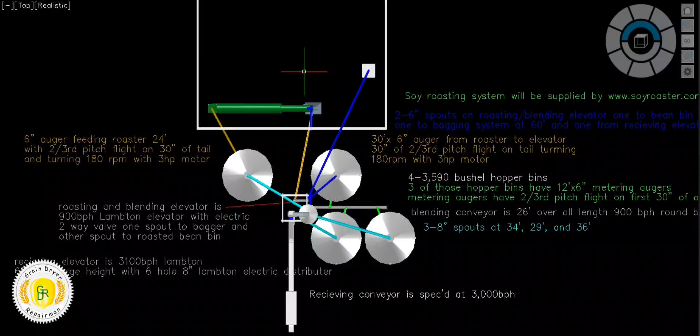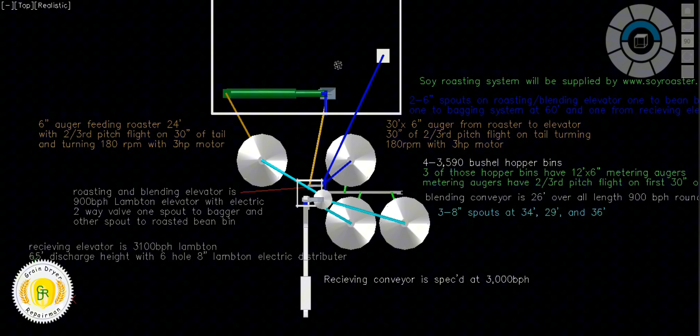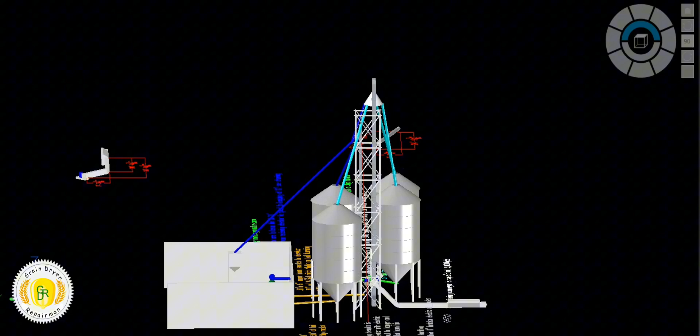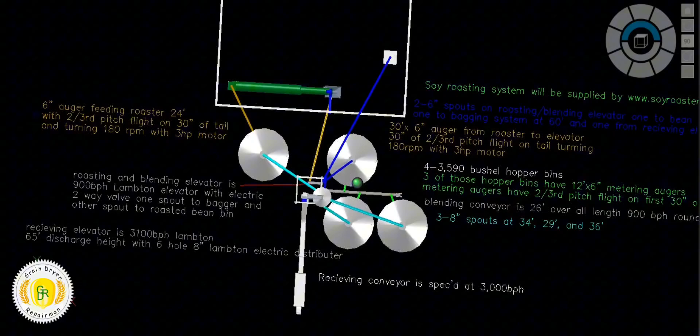Well, here we are. We're going to look at this facility for blending and bagging grain. We're going to roll it around a little bit. For a start, we have a receiving conveyor here. Trucks are going to drive across. It is above grade. So if we get this right at grade, it is right above grade. Comes up here. We're going to look at the measurements for that right away.

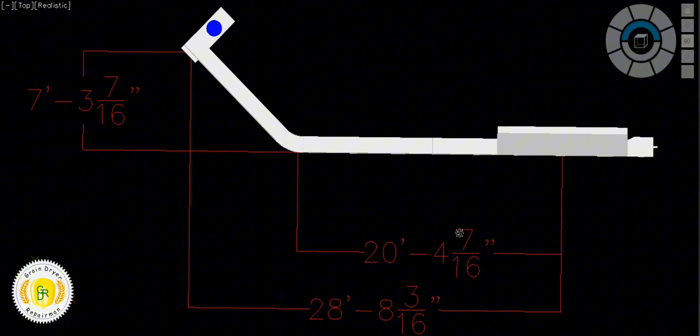This is the conveyor. We have 20 foot 5 inches from the center of the hopper to the elbow. We have 28 foot 9 inches, 8 inches, somewhere in that range, from the center of the hopper to the center of the drop. We have 7 foot 3.5 inches of rise from the bottom to here. And if all of these measurements are within a couple inches the same, that's great. We're not looking for exact, we're looking for very close.

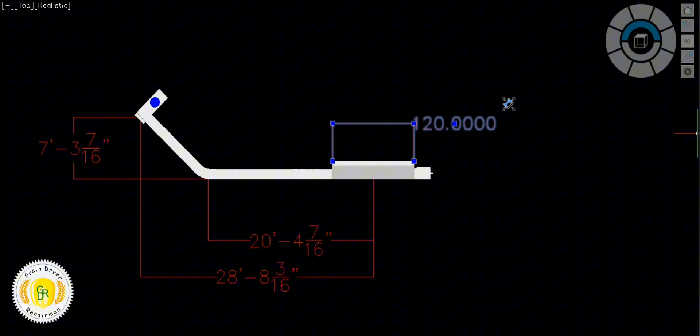So I forgot to put one measurement on here that you're gonna need to have. So we're gonna put that on here right now. And that is the hopper size. That's a 10 foot hopper. So that tells you everything you need to know for designing that drag conveyor. Now it is spec'd out as a 3,000 Lambton receiving drag, Lambton conveyor.

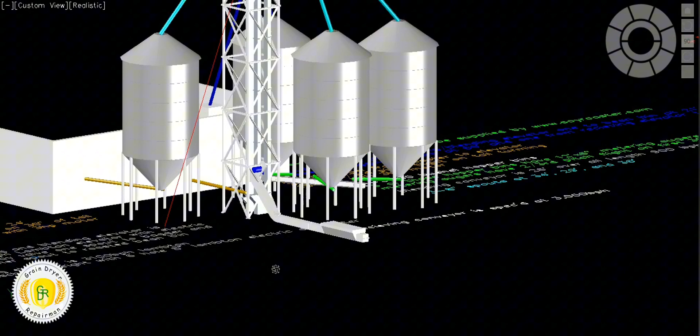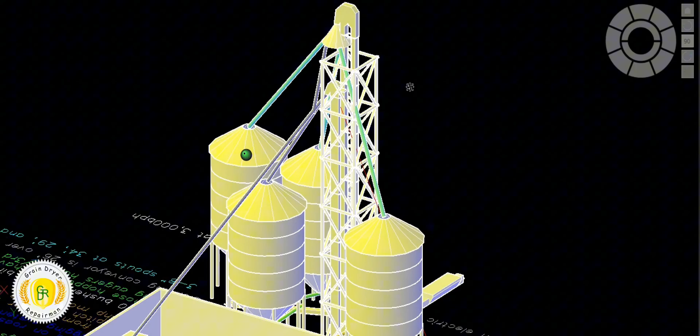The elevators, well, we're going to look at the tower next. We have drawn in here a 60 foot high 8x8 support tower. That is to hold, if you see in here, a little elevator and a larger elevator. I changed the view to make it easy for you to see everything. But inside there, we have this little elevator and we have this bigger elevator.

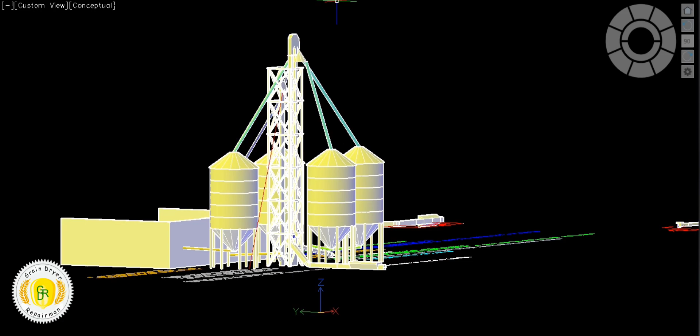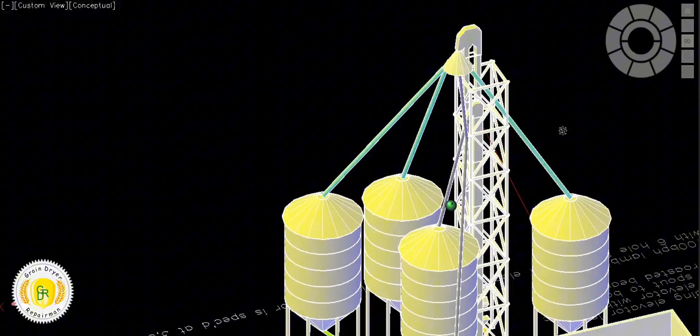The larger elevator is a Lambton 65 foot discharge with a 6-hole distributor, 8-inch distributor, electric distributor. So this receiving drag goes into that large elevator. That large elevator has 4 spouts. One to this hopper bin, one to this hopper bin, one to this hopper bin. Then it also has a drop spout here to this other spout. This is a spout that

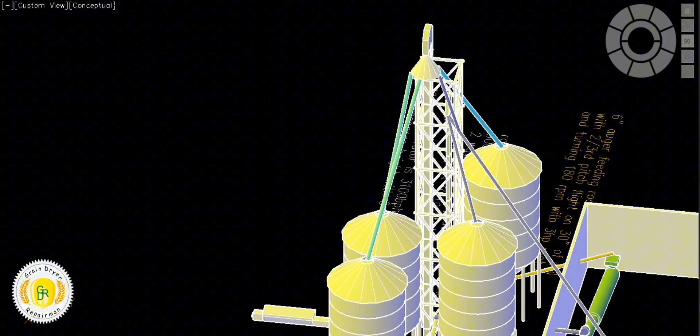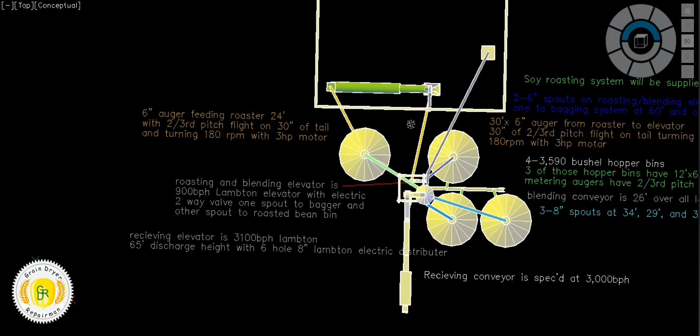I need both elevators to be able to go to bagging. That way, if we're not roasting and we're receiving, we can bag through there. Or if we are roasting, we can bag through the big elevator. So if you look here, we have a little different colored spouts. These 3 spouts are 8-inch spouts, and these 2 here are 6-inch spouts. So these here are blue spouts.

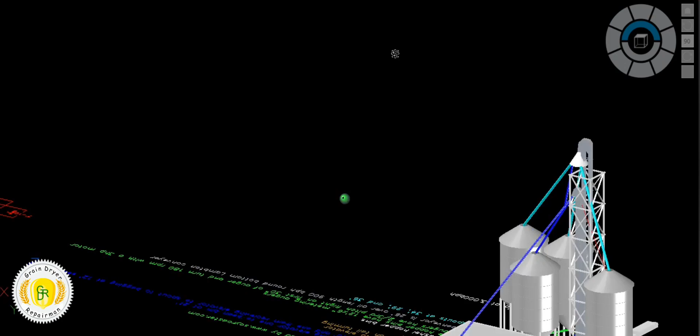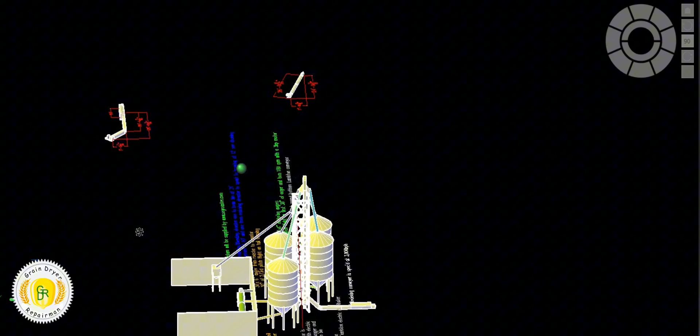So we have 2 6-inch spouts off the blending elevator, one to the bean bin at 21 foot, and one to the bagging system at 60 foot. And then there's a 12 footer that drops between the big elevator down to that little spout. So that larger elevator, the receiving elevator, is drawn in at 65 foot discharge height. And this bin here is a raw bean bin.

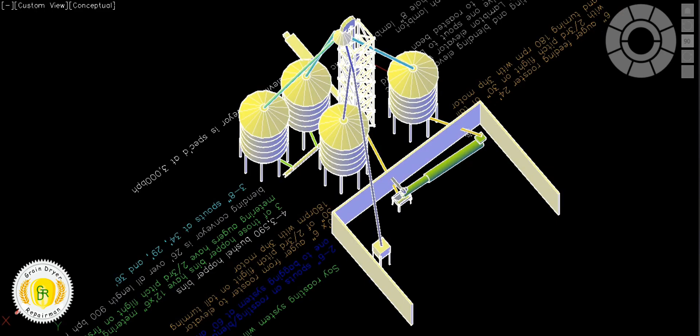So coming off the bottom of there, we have a 24 foot auger coming in to feed the back of this roaster. That has 2/3 pitch on the first 30 inches. It has a 3 horsepower motor on the auger, and it's 24 foot long. It has it explained here. It also has to turn 180 RPMs. So we will probably need a gearbox on there because we want 180 RPMs.

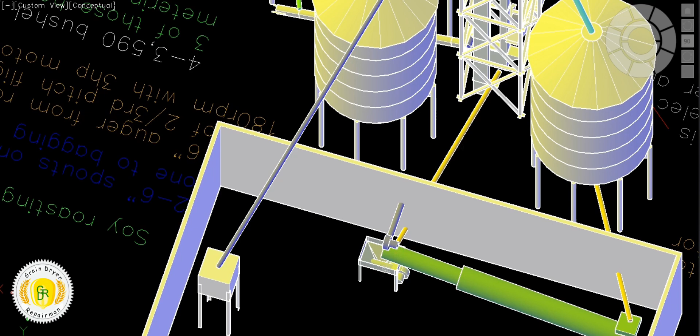Here we have this auger going out, dumping into this small elevator. This, again, is a 6-inch auger. This one's 30 foot long. It has 2/3 pitch on the tail end of it. And this also needs to turn 180 RPMs. You're going to notice a trend in this system where lots of parts are identical. Every auger in this facility gets run at 180 RPMs with a 3 horsepower motor.

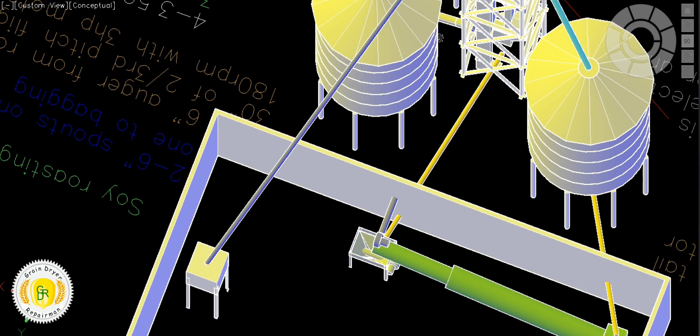Yes, this is a 30-foot auger. This is a 24-foot auger, and the others are going to be 12-foot augers. But they all get 3 horsepower motors, turn 180 RPMs, and have 2/3 pitch flight on the tail. So here, that there goes up. That would be the auger going to the roasting.

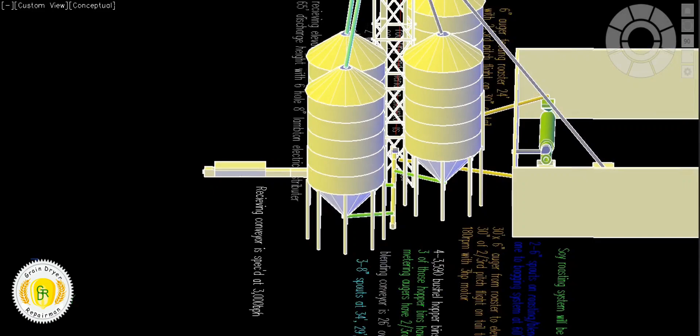Then we have our 12-foot augers. I believe there are 3 of those augers. They're 12 foot by 6 inch with 2/3 pitch on the first 30 inches of the tail where they take in. They turn 180 RPM, and they have 3 horsepower motors.

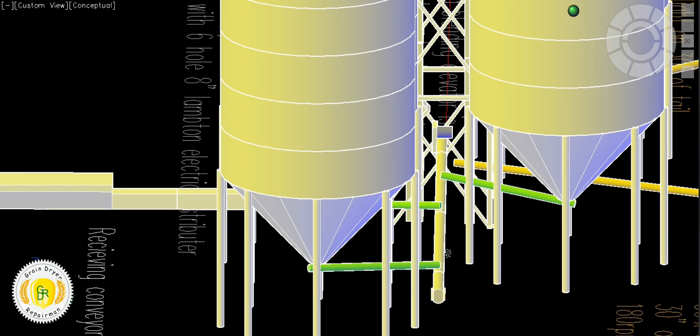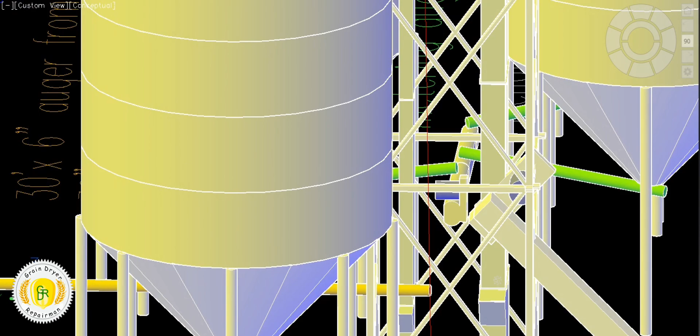They feed this round bottom conveyor, this Lambton round bottom conveyor, complete clean out. This is our blending setup. So that conveyor is going to have a K valve in here. I don't have it drawn in there, but a K valve so that can go to either elevator. It'll be a manual K valve with a sensor on it to verify the position it's in.

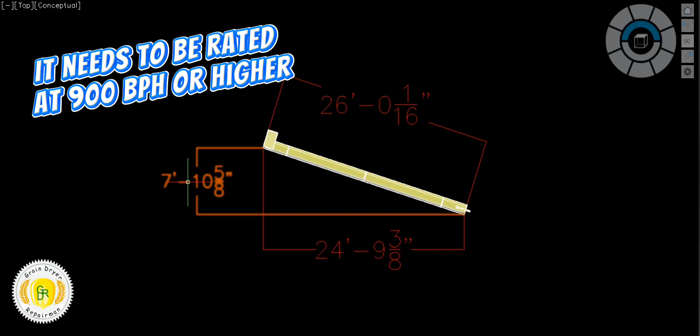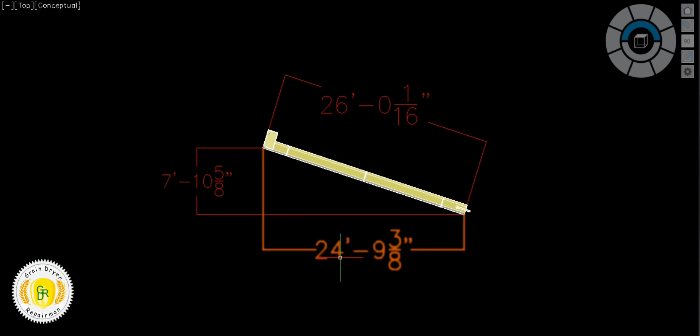That conveyor right there, we're going to look over here at the specs of that conveyor. There the specs are. It's a 26-foot long conveyor. It has about 8 foot of rise. That way we have enough height to have the K valve and dump into the elevators. We have a little over 24 foot horizontal overall length, but it's a 26-foot conveyor with 8 foot of rise.

So we're going to go back over here. We covered the 2 elevators, the 6-inch spouts. This big elevator has an 8-inch 6-hole electric Lambton distributor. It has 3 spouts, one at 34 foot, one at 29 foot. This is 34, I think, 29, and 36, if I'm not mistaken. Either way, it doesn't really matter.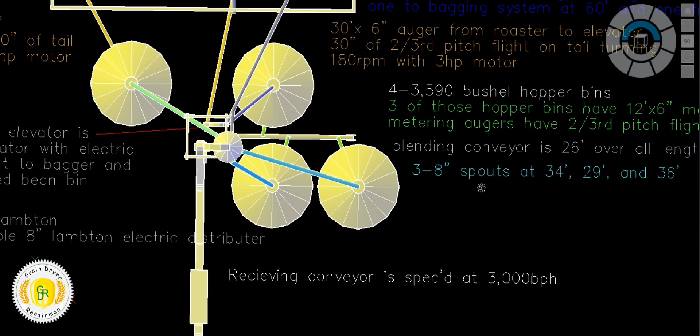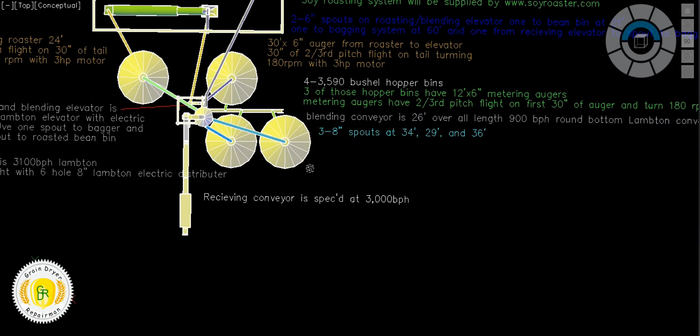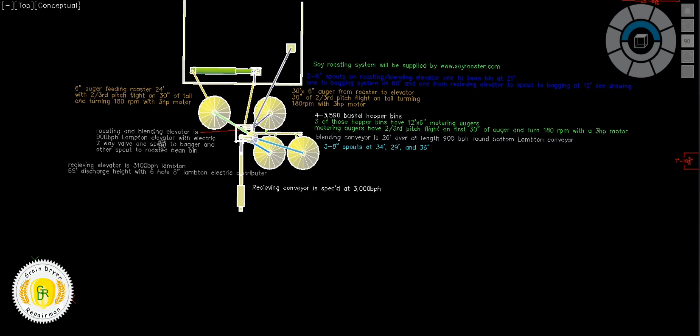And then receiving conveyors spec'd at 3,100 bushel an hour, 3,100 Lambton, or 3,000. Feeding a 3,100 elevator, 8-inch spouts. These are our receiving elevator info, 65-foot discharge height. Roasting blending elevators, a 900 bushel per hour Lambton elevator with electric 2-way valve. 1 spout to bagger and the other spout to roasted bean bin.

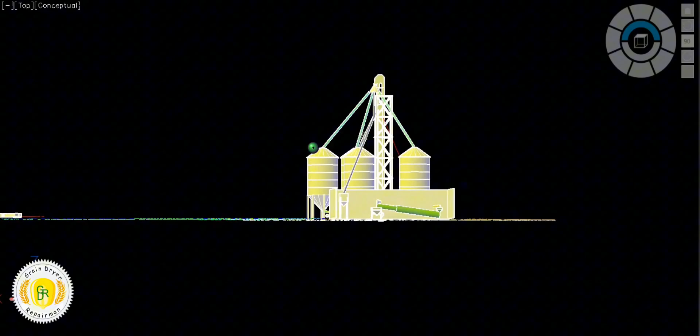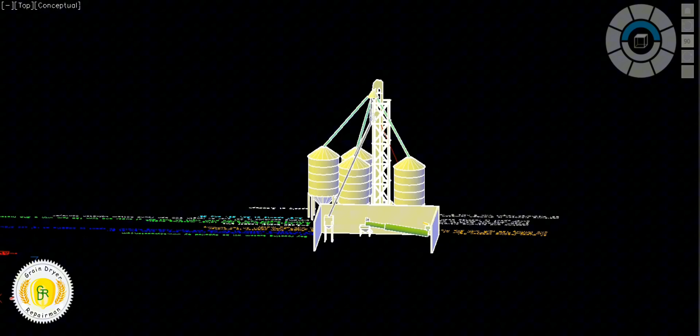And if we look here, that elevator is a little bit smaller. That's going to have right about a 55-foot discharge height. 50 foot would be fine. Somewhere around 50-foot discharge height would work fine on there. I have it drawn at like 52 foot. We'll measure it here just to make sure. Yeah, it's drawn at 52 foot discharge, which is a good height. That's plenty big enough for everything it needs to do.

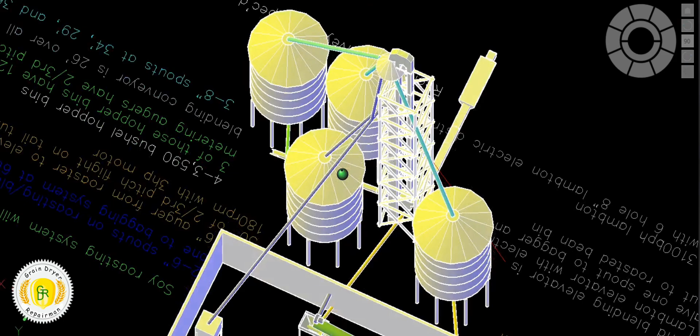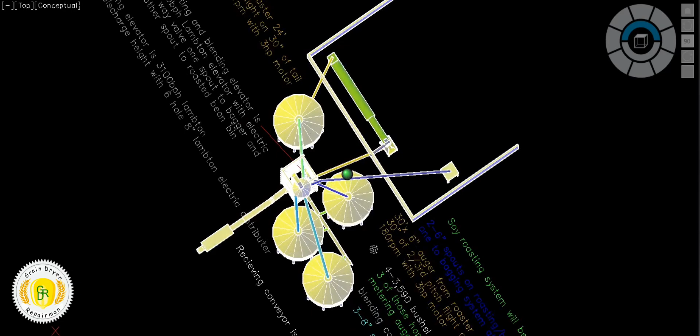And then that is going to be complete. This will all be an automated facility. I will take care of the automation on that. And that's what we got going on. This will be a blending where this stuff will be blended into the mixing hopper. Nice part about this facility is it'll be very easy to grow this facility a lot.

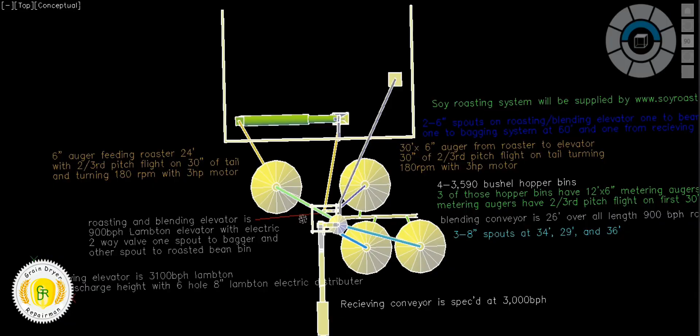We can fit a grain cleaner in here, another bin, a dirty bin here to feed the grain cleaner. We can put 2 bins here, 1 bin here, extend this conveyor 10 foot and more than double our ingredients. There's a lot of stuff we can do here that won't take much infrastructure to double the size and capacity of the facility. So that's what we got going on.

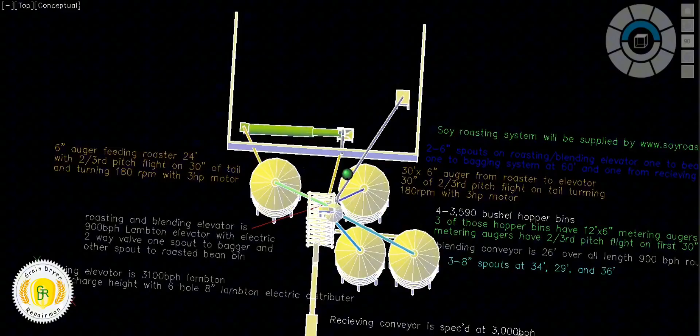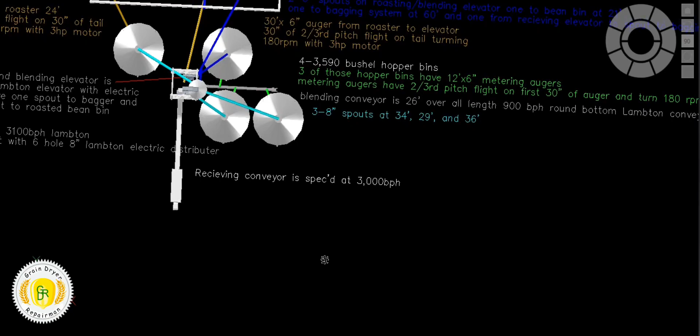So let's change the view here just to roll it around and look at it in a different view. But all the writing is in there that explains what everything is. When I design things, I like to keep things simple, like having every auger that's 6-inch have the same RPMs, the same motor size.

Now you say, well, I'm going overkill on these 3 augers. Well, the reason is these augers are going to be running really slow. They're going to be running like 10 hertz. You could have one running 40, but you could have one of these running 10 hertz or even down as low as 5 hertz. So yeah, a 1 horsepower motor would run one of these, but so we're not going to have problems with what I'm going to be doing with this facility, these need to be overpowered.

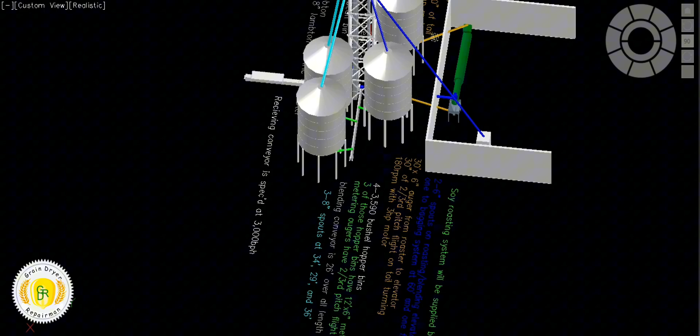Now these over here, this 30 footer is spec'd at a 3 horse. This 24 footer, 3 is plenty. But doing it like that simplifies everything. Then there's no building where we got the wrong gearbox on the wrong auger or something like that. Everything's just very straightforward on how everything's going to work.